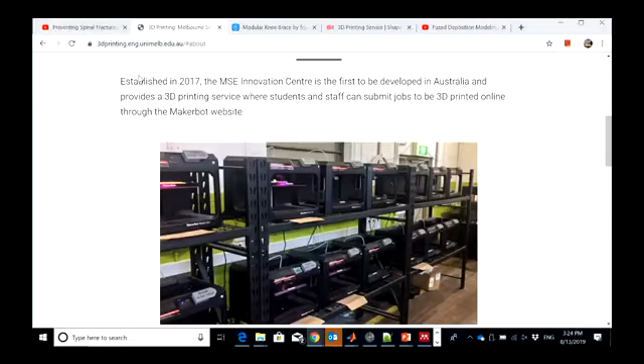Let me show you guys something that I talked about last year. You can find this on YouTube, they put it here too. What is it, 3D MedLab? I talked about something else, but since I had this class last year as well, I described a little bit about what's going on, and I even showed them some of the part that you can actually find.

Is the internet connected? I think so. It's connected, but I don't know why it's not working.

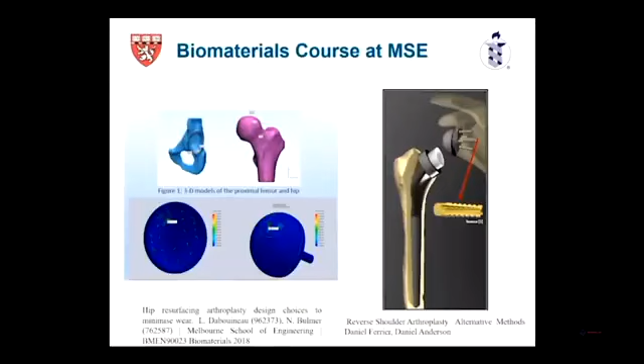But anyway, you see the whole idea here, as you described. These days, if you want to go through patient-specific modeling at any time, there will be some sort of collaboration between surgeons and engineers, as you can see on the left-hand side. And there would be some sort of medical images. So there's something missing, or imagine not even missing, there would be a tumor, for instance, somewhere. This is an example that some of your friends did.

So, something like this - you probably can't read them, but this is exactly one of the things that one of your friends or colleagues here did. You can read it only from here, cup and taper, am I right? The orientation, this is a title, then introduction, method - they did all these things and printed it at the end. That's basically what you mentioned, right? What was your name? Tim. So what Tim said exactly, so you see a problem, right?

Clinical problem. Based on that problem, let's say someone has got a tumor somewhere. The surgeon is going there to cut that tumor, and there will be a narrow hole, something empty, like a bone area. Then you do the CT scan of it, so you know where something is missing. Then, similar to how you guys are doing it with mimics, you develop your product, because you have an idea, you put it there, and you find the material, all these details you're going to learn this year, like compatibility. Then you make sure that works, and you finalize it - and that's not just one way, as you can see here.

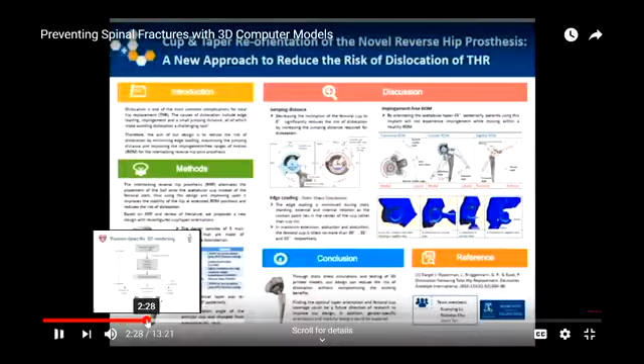So we can watch this later, but I'm just going to stop here. You have medical image of it, then patient-specific modeling based on the image processing that you do. It could be anything - we're using mimics now, but there are hundreds of them out there. Then comes the surgical plan. So you want to plan for that surgery, or the surgeon is going to plan, not an engineer, right? But there's an interesting procedure here - engineers are involved from here as well. You don't have an MRI without an engineer, but surgeons are using them mainly.

But let's talk about the bigger picture now. The engineer would look into the anatomical model, again from the CT, and then what's happening with the instrument they're going to use - how they're going to do custom implants, for instance, based on whatever the question is. At the end, they're going to print it, and the surgeon will do it. But one of the things is missing here. Can you just tell me what's missing here? There's something missing here.

This graph - can you tell? Everything's perfect, right? Nothing is missing. Anyone can find anything or can come up with anything that's missing? No? What's that? Very good, that's exactly right.

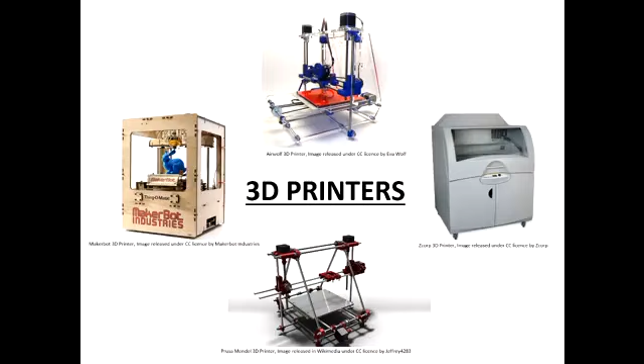All right, so let me show you quickly a few things here. Any question, guys? No question? Back on the diagram, what's the difference between patient-specific instrument and custom implant? So where was it?

Yeah, I did it last year, so I should think like you guys.

Let's go. Surgical planning, patient-specific instruments, and custom implants. Okay, so what does this look like?

When the surgery happens, have you been in the operating room? Some of you say yes. So when you're there, you want to do something, let's say a TKR, total knee replacement. You have some implants ready, right?

But in order to do them, you need other instruments to help with the procedure. It's like a mechanic - you want to change a part of the car, but you need a lot of instruments around it. Those instruments also need to be patient-specific to some extent. This may refer to that.

This is an interesting point for some of you if you want to continue and start a startup or something like that. There are areas in 3D printing that people focus on exactly that - custom-made implant type of things.

So there are people working in this area, but there are a number of people, and this is quite missing, like how to implement this implant. There are instruments that need to be done.

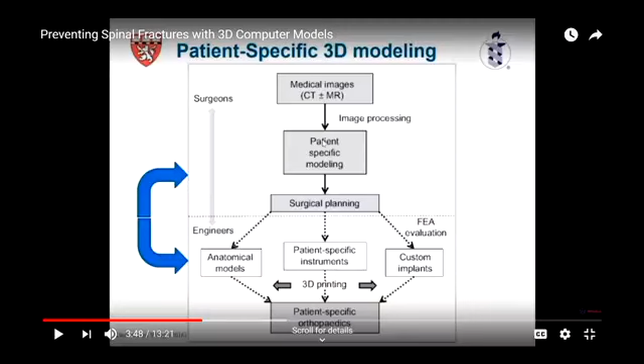Have you heard of that? There's a course called 'by design' - they do something slightly different, where students go to the hospitals and figure out what the problems are, then do a project around that. So each one could be an area for your future if you want to really work in this field. Does it make sense, guys?

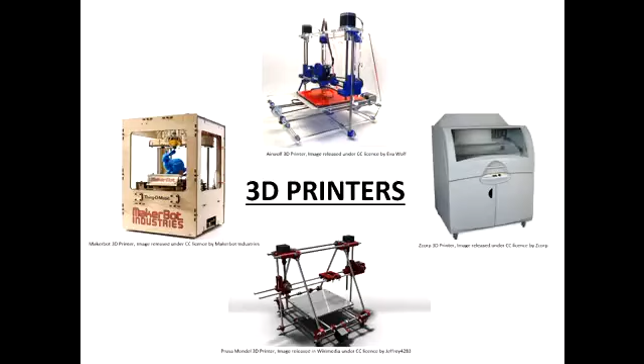Yeah. All right, I think we need to quickly tell you a few things, because you can figure this out - there's heaps of things out there. As I said, lots of things in printing, bioprinting, they change pretty much every day.

So the general idea is you can quickly do prototyping, they're quite fast compared to traditional methods like milling and other details you've probably seen. Traditional methods are time consuming, and they're good for research. You just have an idea.

Do you guys have anything at home, like a 3D printer at home? You have it? You're thinking you have it or not? Let me check if I have one at home. You have 3D printing at home? Anyone? Someone just raise their hand? Yeah, cool. So what are you using it for?

Prototyping. Excellent, what type of prototyping? Electrical? Oh cool. I actually have a friend here who has one, and he's doing a lot of - you've probably seen it - hands for amputees, and he develops a lot of soft robotic type things. They have electronic parts like microcontrollers, and you control the hand and arm and stuff. So they have it at home and do it. You guys can have it too - I'm sure it'll be quite common in the next maybe 10 years or so.

Like a proper printer that we have, it could be a 3D printer. Anyway, we talked about subject-specific type of things you want to do. The cool thing about 3D printing is if you have a 3D model, you can actually print it.

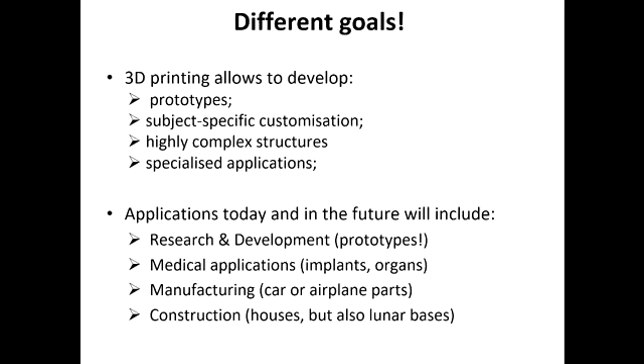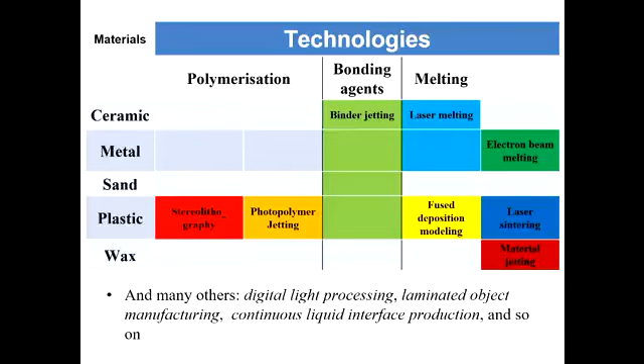So you know the applications, I don't want to just go through them, you can have a look later. There are many technologies - you can have ceramic, metal, sand, plastic. Just Google them on YouTube, there's a huge number of things on how they work. I'll show you one or two examples, and then you guys can go ahead and do your best. So one of them is fused deposition modeling.

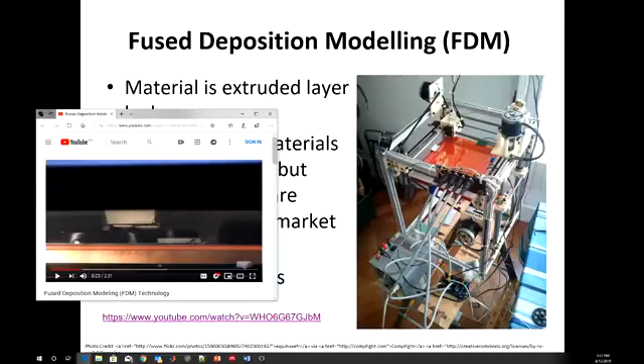Let me see if it works here. Hopefully it would, well, it's just 2 minutes, so let's see. Hey guys, oops, it's showing here, but yeah, I'm bringing it up. Okay, I think I should bring it over because I have two monitors, and it's going to the other monitor that I don't have here. What happened to this computer? Okay. Hey, can you see it?

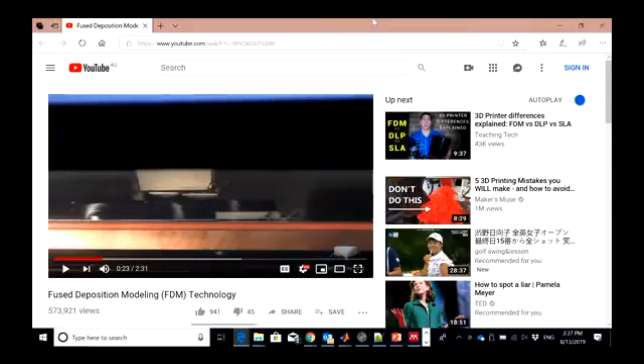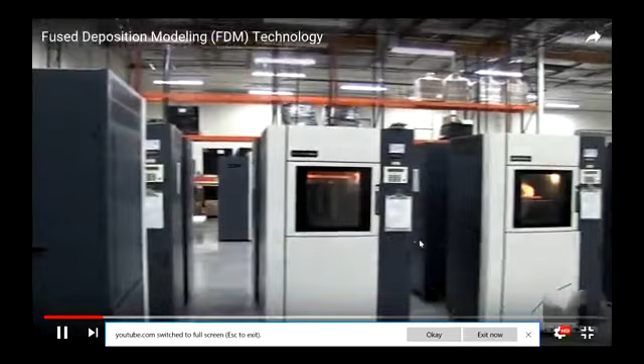Fused deposition modeling, or FDM, is a layer additive manufacturing process that uses production-grade thermoplastic materials to produce both prototype and end-use parts. This technology is known to accurately produce feature details and has an excellent strength-to-weight ratio. FDM is ideal for concept models, functional prototypes, manufacturing aids, and low-volume end-use parts.

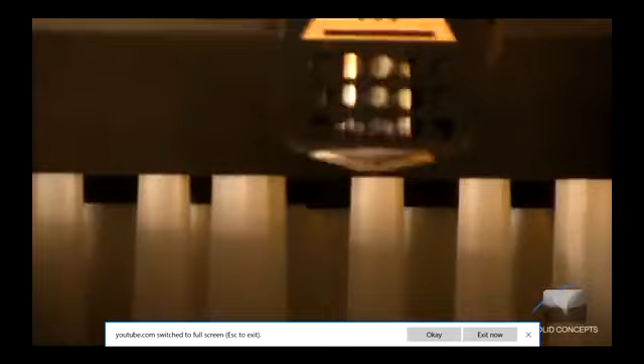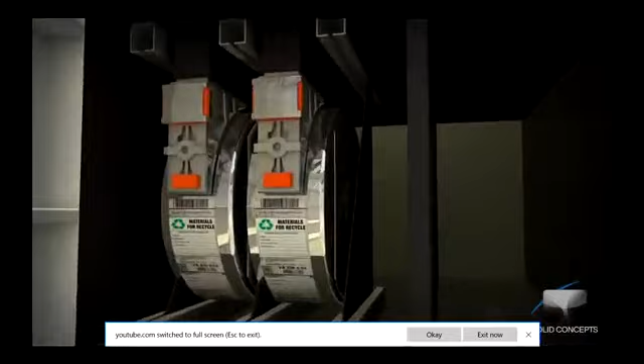The FDM process begins by slicing 3D CAD data into layers. The data is then transferred to a machine, which constructs the part layer by layer on a build platform. Thin, thread-like spools of thermoplastic and support material are used to create each cross-section of the part. Similar to a hot melt glue gun, uncoiled material is slowly extruded through heated nozzles. The extrusion nozzles precisely lay down both support and thermoplastic material on the preceding layers.

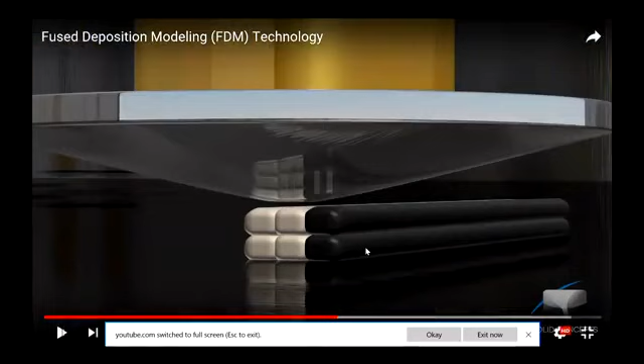So guys, that's the whole point. But pretty much all of these 3D printing technologies are based on that - really going layer by layer. So in order to do that, your model needs to be, what do they call it...

It needs to be sliced, right? So there are many software packages that you can buy. You have a 3D model, and you'll learn this in your tutorials or workshops - if you have a 3D model, it's not just a solid 3D object. You can consider it as each layer, and overall it makes up the 3D shape, but it's not a proper volume that you can see. Does it make sense? There's a subtle difference between an STL type of file and, let's say, a SolidWorks type of volume. You know what I mean?

Because in SolidWorks, if you have a sphere, the sphere is a proper sphere. But if you have a 3D printed version of it, you can't make it a perfect sphere - you need slice by slice, with lines going around each circle. If you increase the number of slices, you get closer to the actual sphere. Does it make sense? So that's the difference, in a way - it gives you the resolution. In each layer, depending on how much distance there is from one layer to the next, that will define how accurate and how smooth the final product would be.

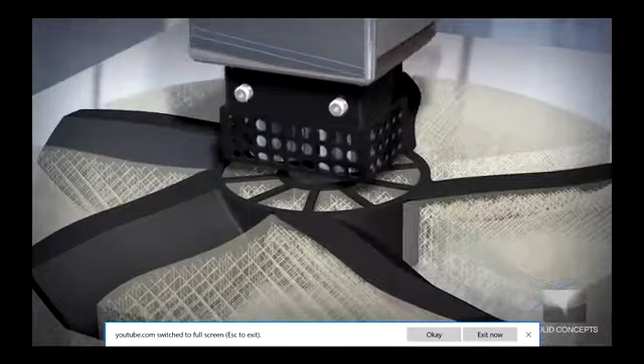The extrusion nozzle continues to move in a horizontal XY plane while the build platform moves down, building the part layer by layer. Yeah, this is also another thing - pretty much all of them have it. So you have a surface, and you build that layer, then this layer goes down and the next one comes up, right?

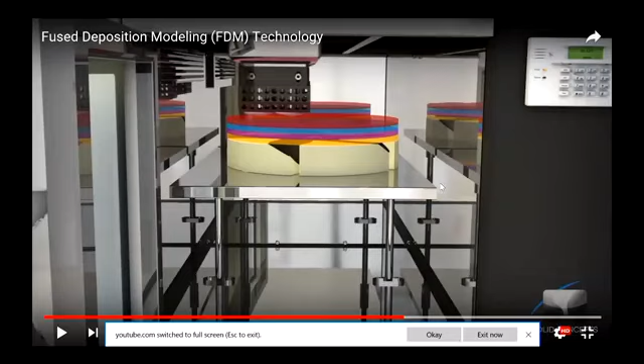But imagine you have a structure that has, let's say, something hanging out. So there's nothing below it, you know what I mean - below the surface that you want this to be on. What can we do then? Does it make sense? So you have a structure with something hanging like that - what should we do?

So you need to support it, right? What can we do then if we support it? So that would be part of it. You're adding something in your geometry, in your CAD model or STL model, putting some sort of support. But the support will be with it when it finishes, so you need to remove it later on. You can put all sorts of supports. I'll show you an example later.

The finished part is removed from the build platform and cleaned of its support material. See?

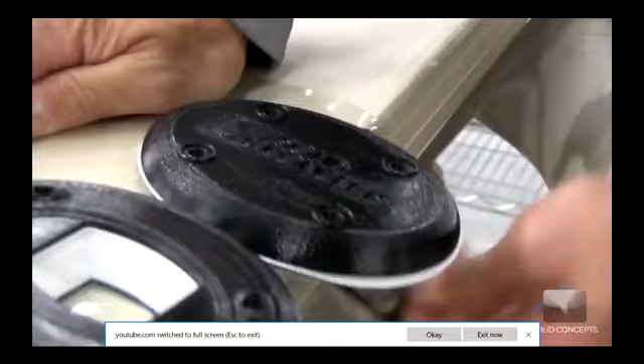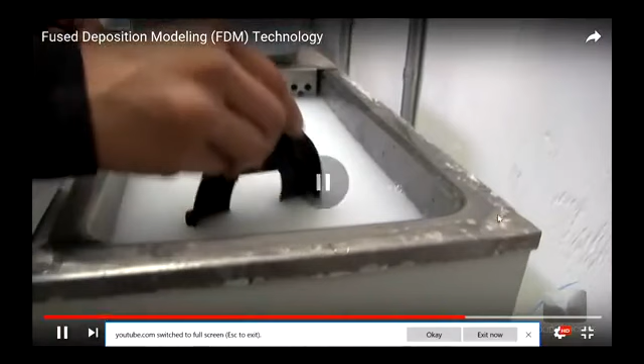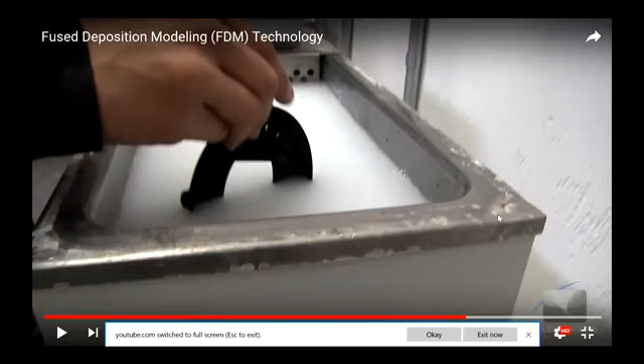Raw FDM parts have visible layer lines. However, service providers such as Solid Concepts offer multiple finishing options. This is also another beauty of what you guys can do - some of your friends last year were good at this, they did some finishing, but some people brought just raw material to us. That's a visual presentation - try to present it in a way that shows you've done more, not less. So just try to sand and stuff like that.

Create smooth, even surface parts, including hand sanding, assembly, and cosmetic paint. You see the differences? That was the first one, and then you did the finishing. Whatever you get from the workshop would be like the first one - they don't do that finishing for you guys.

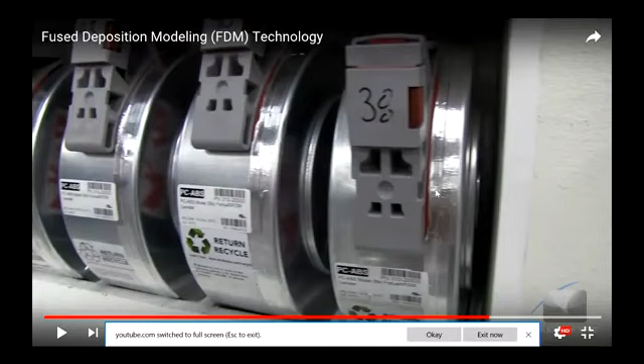FDM parts are constructed with production-grade thermoplastics, including ABS, polycarbonate, and ULTEM. They are both functional and durable. You see the difference? FDM is utilized in a number of industries, including aerospace, automotive, industrial, commercial, and medical.

Cool. So you get an example of it.

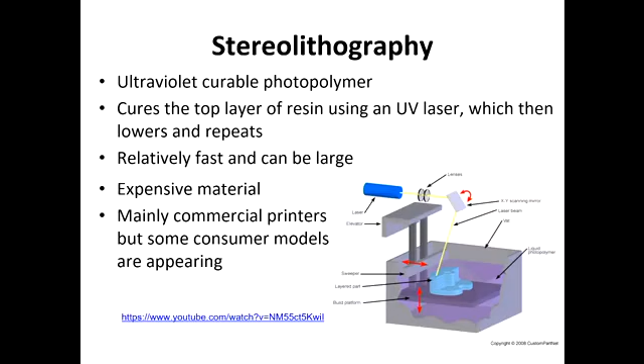So there are several other methods working here. This is another one - I'll send you this link, go ahead and watch it, because it's quite similar in idea. This is also cool, but it's like a laser version of it - slightly different. Let me see if I can show you guys this one.

Do you guys have any questions?

Can you see that? Yep. There should be a... let's watch this one together.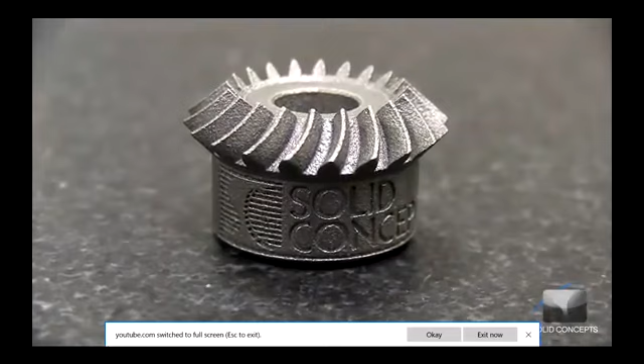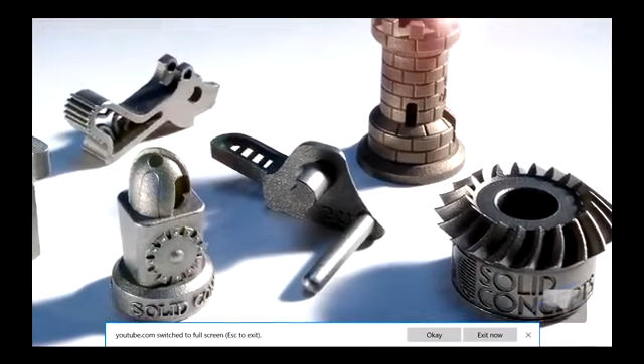Direct metal laser sintering, also known as DMLS, is an additive manufacturing technology that creates metal parts directly from 3D CAD data without the need... So you see the differences - this is metal actually, not like the plastic type of material. It's quite different - laser, and each layer is built up. DMLS utilizes a variety of metal and alloy materials, such as stainless steel, cobalt chrome, and Inconel, to create strong, durable parts and prototypes. DMLS is an excellent choice for functional metal prototypes, high temperature applications, and end-use parts.

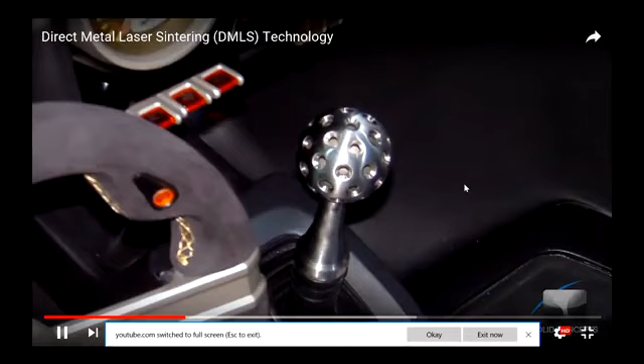This is quite critical - material selection is a big area people might be interested in. Mainly those who study chemical engineering or material science go there, but other engineers can too, even biomedical engineers. Whatever you want to do, there are people who just focus on what material is needed for a product and try to figure it out. They ask a lot of questions - is temperature the issue, is pressure the issue, is fatigue the issue? For mechanical, chemical, electrical - all sorts of things you need to consider.

Imagine you want to develop something for Boeing, for an airplane, for a car, whatever. You have to consider the environment for that, and then you can properly define it. After that, you say okay, this is the material I want, and then what type of methodology you want to build with - that's where engineers come in.

For you guys, like biomedical engineers, it's the same thing - what is the problem, what is the application, then you choose the material and how to model it. Then the next stage is which methodology is best for this particular one. That's why it's good to learn most of these things - just have a look and find them in this type of thing.

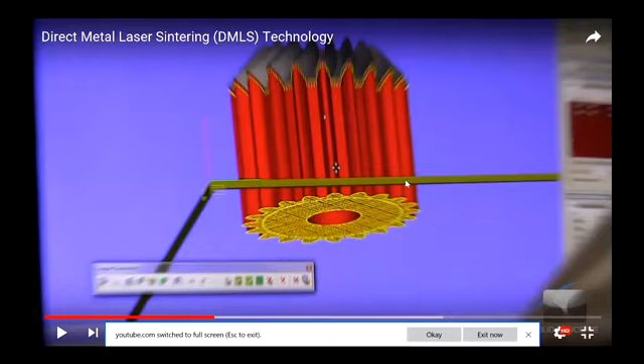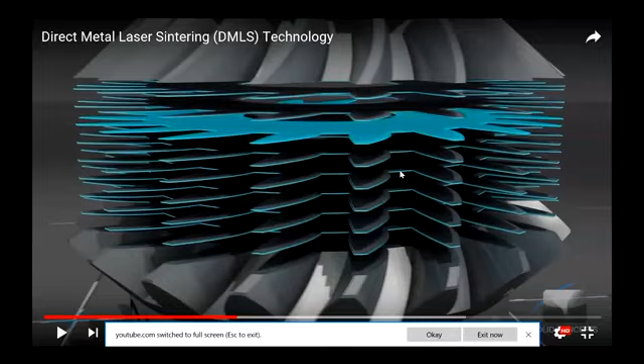The procedure is the same, but some of the methodology will be different. You can see we're following pretty much the same procedure. The program takes 3D CAD data and mathematically slices it into 2D cross sections. Each one is a mathematical procedure creating the 2D version of that 3D model. Each of these sections acts as a blueprint, telling the DMLS machine exactly where to sinter the metal material.

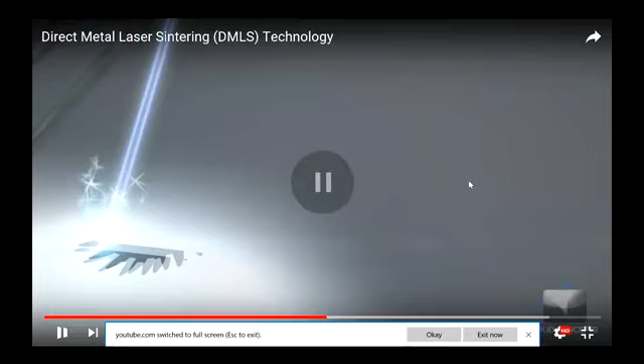The data is then transferred to the DMLS equipment. A recoater assembly pushes powdered metal material from the powder supply to create a uniform layer over the base plate. You can see the powder is there, and the laser is going to cut that, then move to the next layer. A laser then draws a 2D cross-section of the surface of the build material, heating and fusing it.

Once a single layer is complete, the base plate is lowered just enough to make room for the next layer. More material is raised from the cartridge and recoated evenly among the previously sintered layer. The DMLS machine continues to sinter layer upon layer, building from the bottom up. As the part is built, support structures are added to give supplemental strength to fine features and overhanging surfaces.

The completed part is removed from the base plate and treated with a hardening heat process to further harden it. Any support structures are also removed. Do you see the support here? This is quite important because it's metal, so you need a proper support for that. The finishing part might take more time.

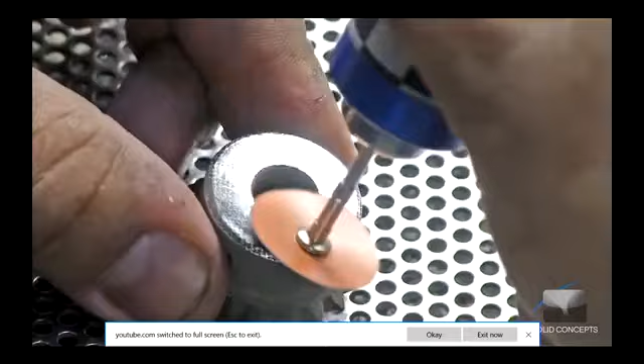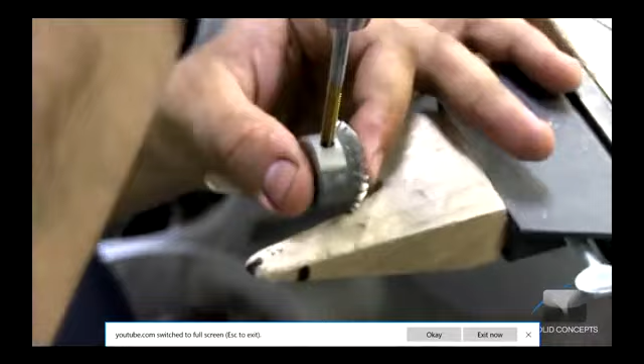With numerous surface treatment and hand polishing options available through service providers such as Solid Concepts, DMLS parts can be used in highly cosmetic applications. Typical uses for DMLS include tools and manufacturing units, small integrated structures, dental components, surgical implants, and aerospace parts.

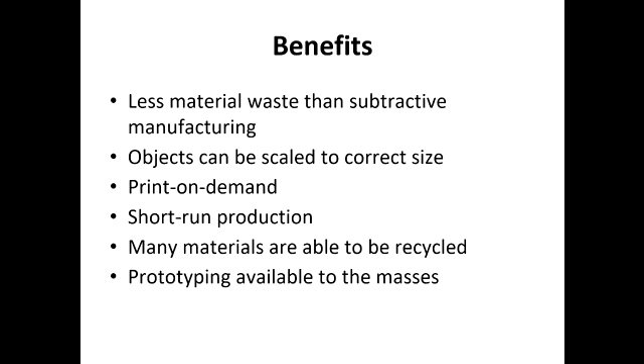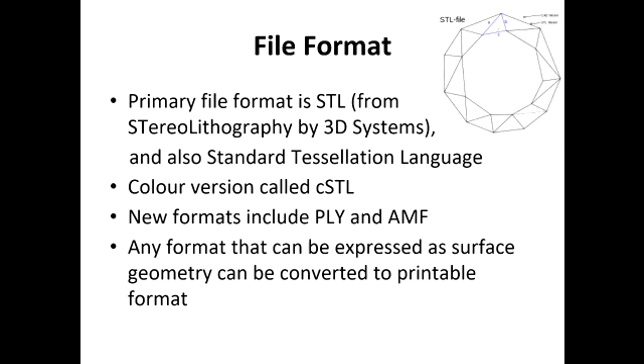This is what I was telling you about the STL file versus the actual model. You can see the sphere or circular shape—the CAD model is a proper circle, but this is the other version of it, so the computer, or the printer, understands it. This is a type of code that you don't need to know in detail. From your CAD model, after slicing, there will be code sent to the printer, and the printer understands all these things and builds it layer by layer from there.

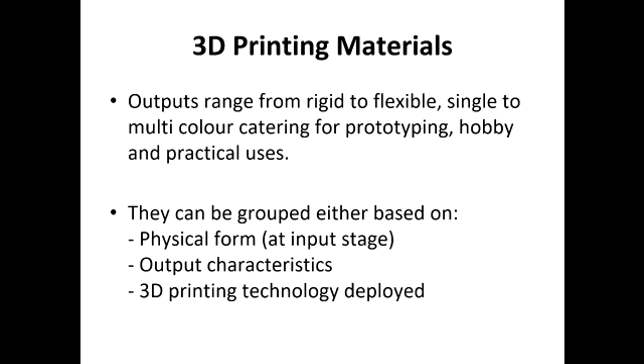We just touched a little bit on different types of materials. There are quite a few, from thermoplastic to metal, as you noticed, ceramic, and even colored or non-colored versions. Depending on what you want, you can simply choose.

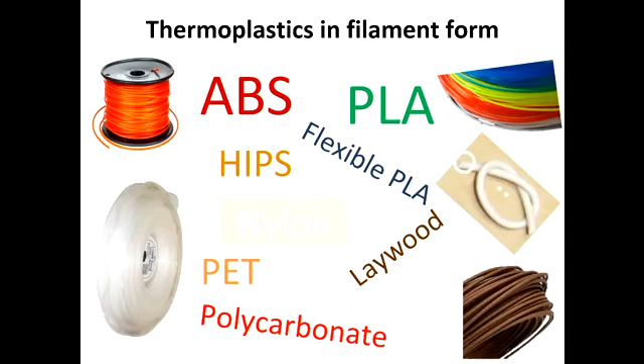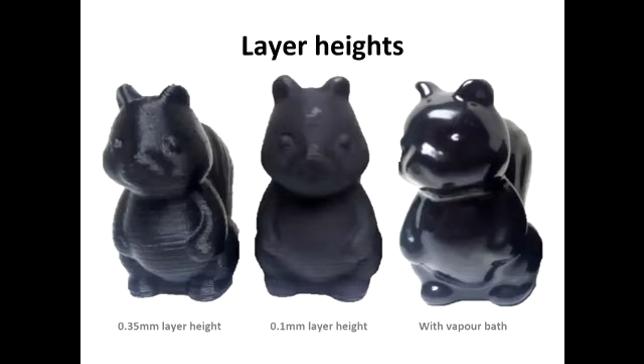These are some of the thermoplastic versions in filament form. You can see the filament will be fed in, melted somehow, and each layer built up on the other. This filament example relates to what we've been discussing in terms of accuracy or resolution—if the layer height is quite big versus smaller and smaller, you'll see different results.

The last one has been finished as well, because it says the vapour bath. So you need to do some sort of finishing at the end, even if it's a small layer distance or height.

Can you see that? All right.

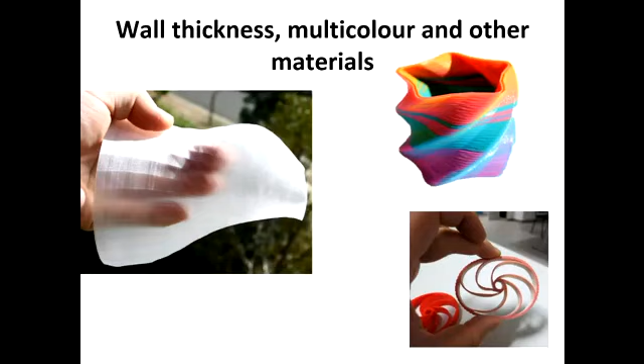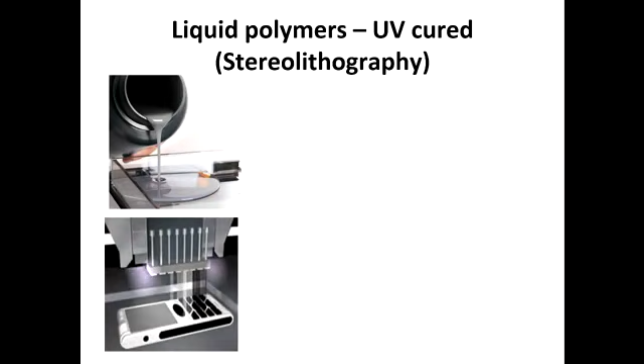Some other applications you can figure out, like wall thickness, or multicolor printing, or other materials we can build. Some of them are interesting because you can combine them and print a sort of soft material. It will look hard, but it's essentially soft robotics type of things. Just Google it, you will find many hard or cute versions of it - there's another technology basically. Just get the names, and I'm sure if you want to know more, you can figure them out.

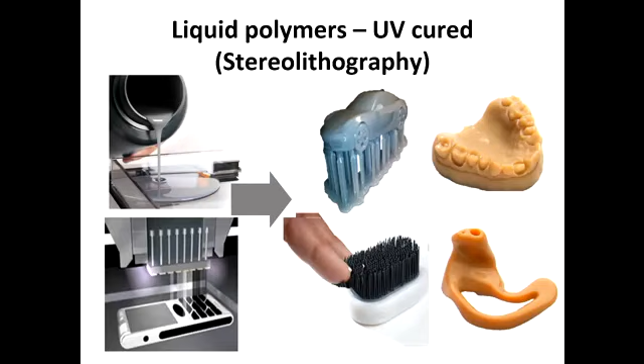They can be used in dental or other types of biomaterial, or musculoskeletal systems, for instance. For the powder versions, we talked about it and I showed you a few things like the laser version, with some examples. There are also other examples in terms of prosthetic versions. There was someone who gave a talk last year.

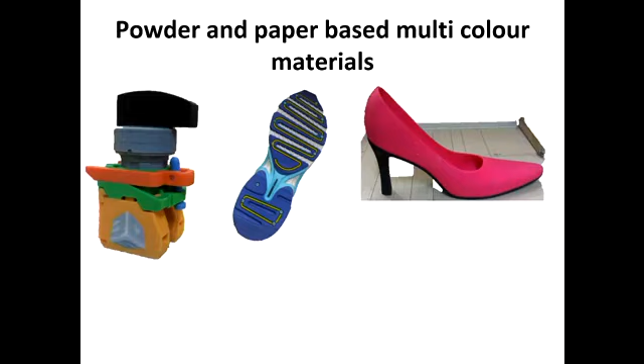I think she came from the States, and she was talking about toys for kids who were amputees, but who didn't have much access - they would be in poor countries or third world countries, and they had a community. I forgot the name, but I'm sure you can figure it out. They had people interested, let's say in Australia, the US, or wherever, and they would be connected to these people, and they would build and print whatever was wanted and send it to them, like to Africa or whatever. There were toys and different types of hands and arms, and that was really a cool project. She had so many people, a big community now. I forgot its name, but it's a really cool project.

It's not just a matter of biomaterial. You see that 3D printing is everywhere, right? From art, to, let's say, even music.

I was actually in a conference three weeks ago about a musical performance. There were people interested in, imagine someone is playing the guitar, but they have a lot of musculoskeletal issues, right? Is anyone playing any instruments? No? But you've probably heard that these guys might have problems because they're doing it a lot, maybe 6-7 hours a day, and they develop different types of musculoskeletal problems.

There was a guy actually building a support type of thing using 3D printing - that's kind of biomaterial. But there was another guy who was not only doing this, but adding some sort of electronic devices into that, while you're playing the guitar, adding extra capability. If you're playing the guitar, you have certain frequencies, so he could manipulate it to access other frequencies with this, using fingers you weren't using before, like your foot or something. So combining a 3D printed version of it with electronic devices - they call it an augmented musical instrument.

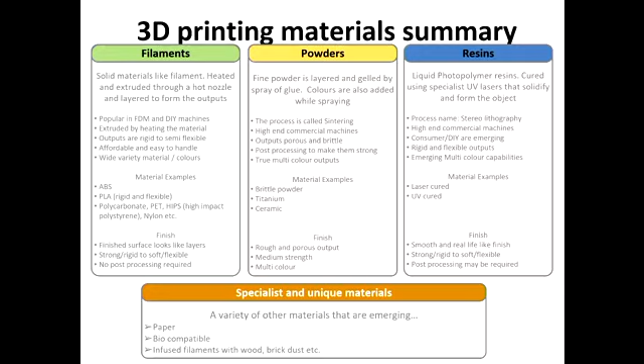So you see the applications - it's not just that you might be interested in this as your career, but anyway. We pretty much discussed filaments, powders, and resins. Have a look, it's not easy to read them, so just have a look after class.

We also talked about this one. Any kind of 3D printing needs a model - you need some sort of solid model so that you can send it to the printer. How can we do that? Can you think of different types? We kind of touched on this - there are three bits. What are they? Can you tell? You're basically doing one of them in your classes, right?

You can do CAD, computer-aided design, or your own cell phone. You know AutoCAD has got one - have you heard of that? Autodesk and AutoCAD have an application you can download, and it might be free for you as a student. When you have that, you can actually go around an object and it will give you the 3D version. These applications aren't that accurate, but good enough for a rough idea of what you want.

Another way of doing it: say you have an object but no model - how do you get it? Like a 3D scanner. There are scanners, one or two in the workshop. We've developed a few things. I've heard it's not easy, but usually you have a handle, or some are fixed and you put the object in. Either the object rotates, or you rotate around it.

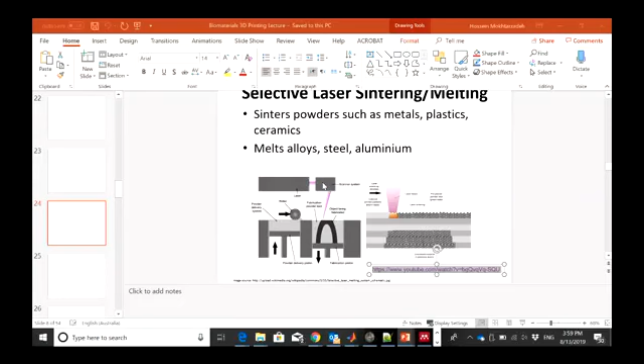There are other things too. Have you heard of this? It's actually a cool one. I was about to develop this with some colleagues - if you're interested in programming and stuff, this is a really good project. What was this called? Styku 3D scanner.

Have you seen this? No? This is also a very good, interesting area - a new way to measure yourself.

Let's have a look. Styku is a body scanner that's revolutionizing the way we track fitness. Simply stand on a rotating platform while a harmless infrared sensor captures your body's shape and composition. And that's it.

Did you get it? So it's basically a 3D map camera, like a Kinect type of thing, which you might have at home. There's a lot out there. You just go around it and that gives you a 3D model. And because you have that 3D model, you can print it, right? Make sense?

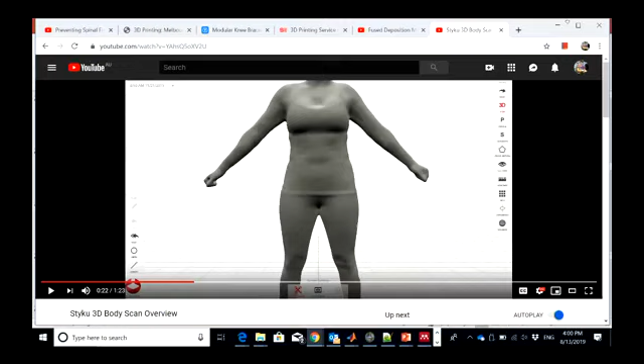Okay, 3D scanners. Or someone has done it for you already - there's a lot out there, right? So all I would do if I wanted to come up with something, just a rough idea, and then print it, is usually this first - there's a lot of websites out there for that.

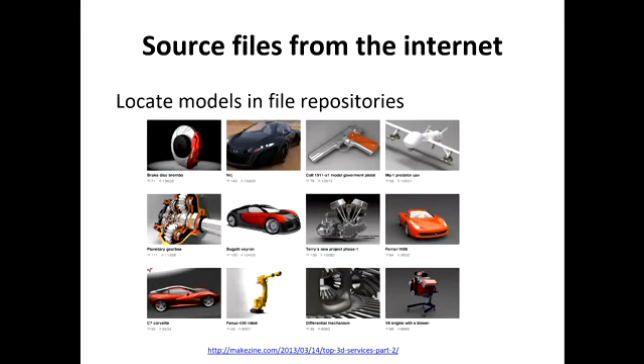Have you heard of Thingiverse, or we have some of them here - Thingiverse, GrabCAD, Shapeways, Format. Have you heard of these websites? Just have a look, they're really amazing. People like yourselves, a huge community, have either scanned it, developed it, or whatever, and they're sharing it. Just be careful about license issues - don't just go and start a company with it and then find out it wasn't yours. It's not for that, it's just for bringing some idea into the 3D world. There's a huge number of them.

Let's check these things, let's see if this works. I'll show you this one quickly - yeah look, I really like this one.

Just tell me something - what object would you like to search for? Can you just think of something? Any word - come on guys, you're like 30 people, can you come up with one word? Bone? Okay, bone. That wasn't very hard, right?

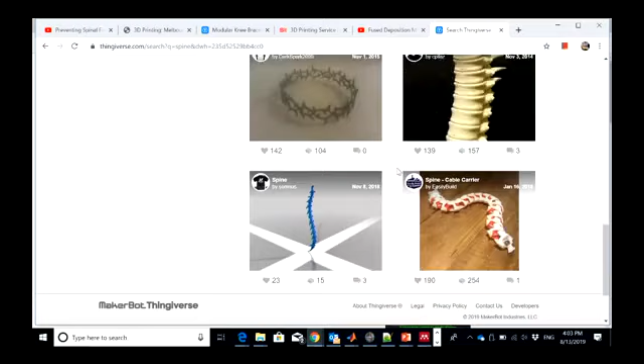So you see different types of results. Let's be a bit more specific, related to our class - let's say spine, you can find a lot of them. Well, let's try knee. So you see people have done it, right? And the cool thing is you just download it and you can actually go around it.

So one way is what you guys are doing, like Mimics and so on - you develop it, develop your own idea, add your implant, and send it to the printer. Another option, if you want to quickly understand what's going on, I'd do this as well - download one of these, if they're like STL files, they usually have pretty much everything.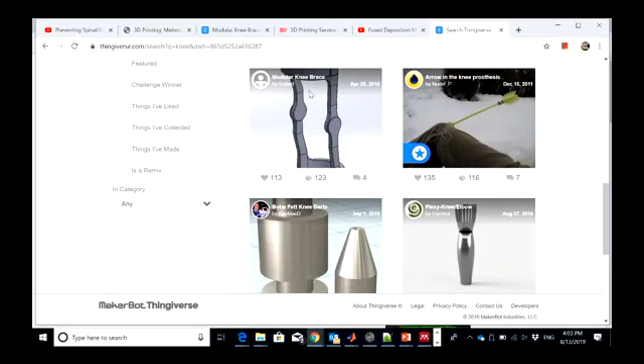Like imagine this - let's go in. You see this person has shared files, and it's like a community. What do they have? They have the files - go ahead, the files are here. You see, everything is here, right? What do you want?

But please don't just copy and paste. We're showing you these things for learning purposes, and do not just copy, because we can easily check that you've copied from here. So use them for your learning, but do the procedure as your supervisor or Peter asks you, for instance. Okay?

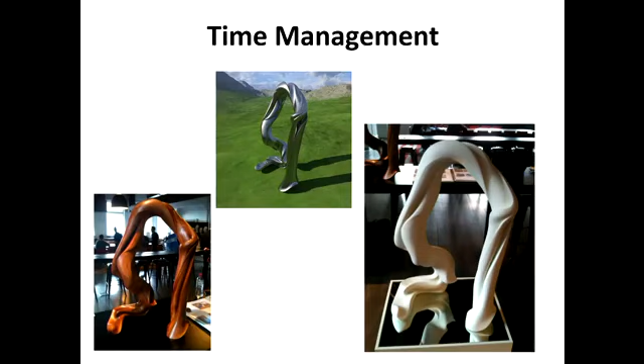And as I told you, just send something for the printer to understand all this procedure and stuff. I can quickly show you that one as well.

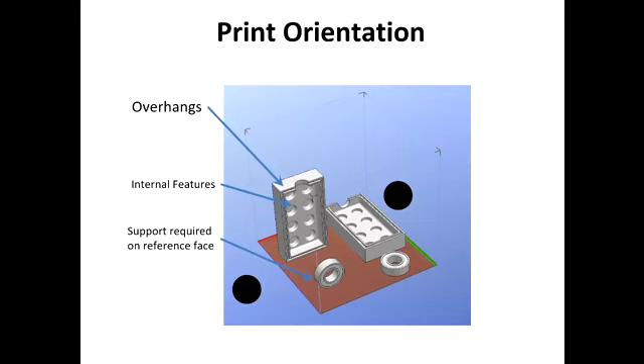So the meshing, we talked about this, resolution, the printing orientation - you may not need to be worried about this, but in the past students had to go and print themselves. How you do it is important, because sometimes you can actually avoid that kind of support just by rotating, printing it in another angle, or using different types of raft or support you can add.

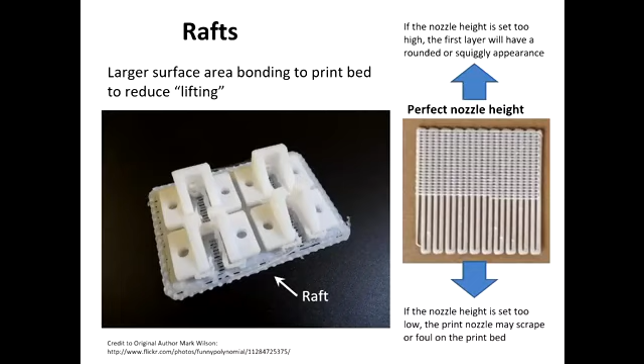Don't worry much about this, but you might submit something to the workshop, and they will come back to you and say, oh, we can't do that, change this one. So you need to change it and then submit it again, right?

Have a look, or the infill - these are the things you should consider. If you have something that will collapse from part of it, you need to put some sort of support within it. So you can have it hollow, that's fine, but you need to support from within. Make sure you understand how the procedure works.

You notice some of them, right? And then based on that, build or make your prototype. Does it make sense, guys? So I want you to just familiarize yourself with the problems that you might see.

It's not just like I print it and send it up and they take care of it - no, they don't take care of all these things. They may just rotate it for you, they may give you some ideas how to improve it, but you would need to understand the details yourself.

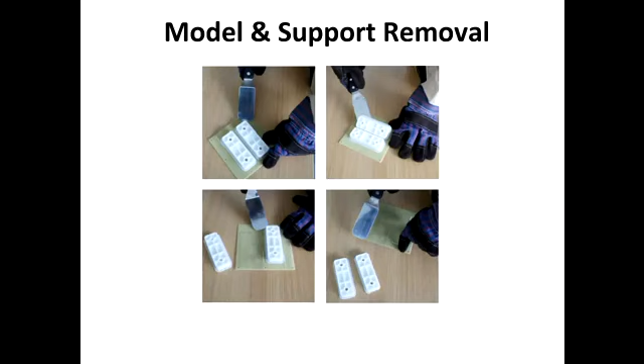So you see here, for instance, like a support here - this type of support we need for different layers, and then they might give you it even with the support, and then you need to cut it out or remove it. I'm doing the finishing part, okay?

This is also another example, removing the support, as I said, and there would be a lot. You may not see it because they would print it for you, and if it's not working they would tell you. But if you don't care about all these details, these things might happen - like the temperature not working well, or the support not being there, there would be quite a lot of difference.

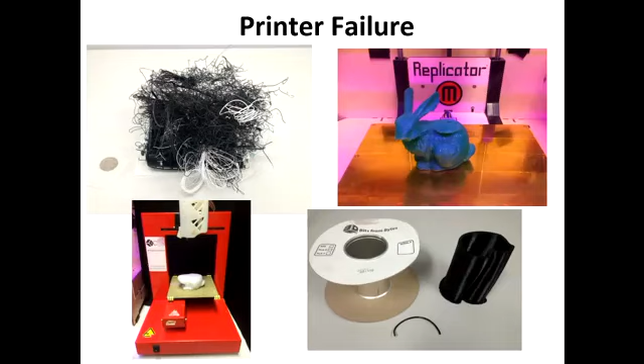I'll show you another thing that tells you some of these problems - the printer failures, have a look. So, engineering workshop, maybe quickly I'll tell you, we have like 5 minutes time, right?

Do you have any questions? No? Are you guys following me? Is it something that, okay? Alright, because there's a lot of things in 3D printing.

You can actually put your life in it, like it could be your career. So you're just touching some of the surface, you can see that. You can actually go to the metal - we have one metal printer here, just next to our Karen lab, and I'll show you a little bit about Karen as well. So you can go and have a look at what they're doing. You probably can't see inside, but at least get an idea, right?

So I think this is what the workshop has, so don't worry about this. You can actually have a look at the details. Maybe I'll show you this before we go quickly. So I think the workshop...

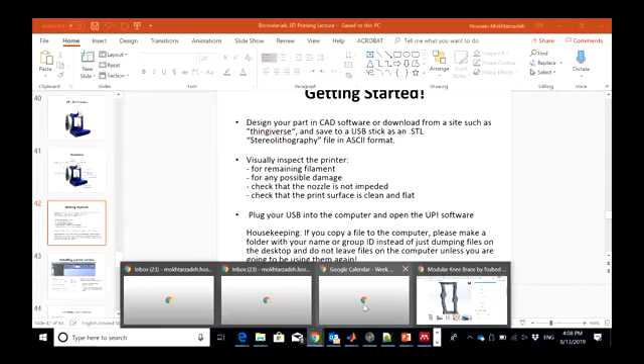So you don't necessarily need to submit a job, but if in the next few months you have an idea, just submit a job to get a feel for it. Because I think it's free for your class - it's all free, so you can do it a few times. And then they'll tell you the details, how to pick up, and where it is, right?

Go and read these ones. These are actually telling you how to submit. We showed everyone this, and people come and ask questions, but they actually go through every single thing, right? So you don't need to go through it now because you can just simply read. They've done a really good job, just go one by one. If I tell you, you have to sit down and follow the procedure one by one, it's not worth it. I'll just show you where to go and find things.

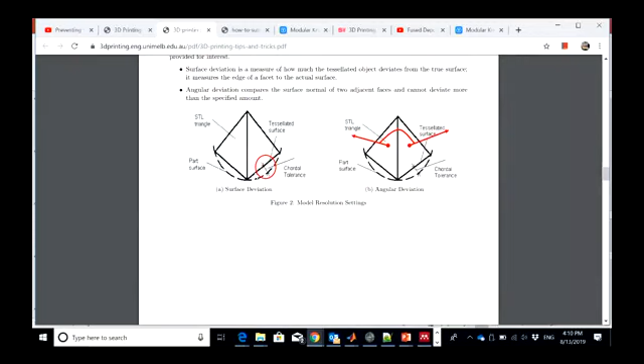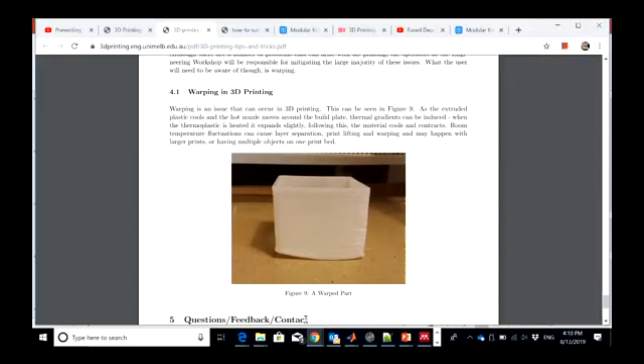Tips and tricks - have a look at some of the things we showed you here, like what STL means, what mesh means, and the different types of errors you would face, like overhanging. Have a look at what happens when we have an overhang, it basically hangs, or there's no support. I'd suggest going through all these possibilities. With this type of part you'd expect it to be right angle, but you see what happens. You probably won't see these type of problems, but anyway it's good to know. Make sure you know the checklist before you submit anything. Does it make sense?

All right, so I think this is pretty much what I wanted to show you guys.

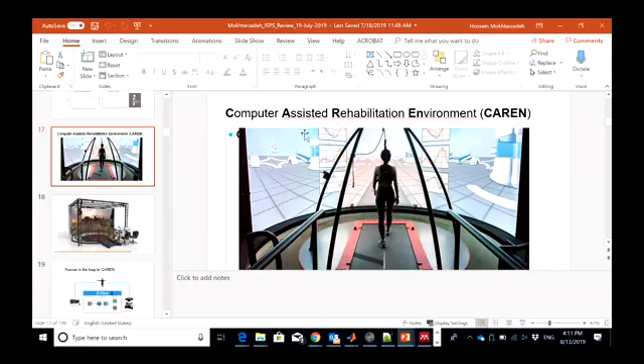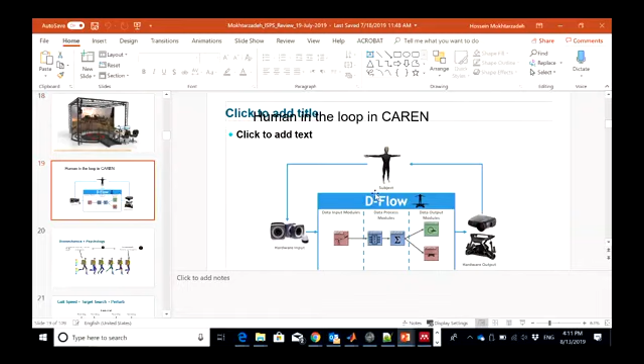Before we go, let me quickly show you a few things. I'm running this CAREN lab as well, and some of you guys are either working with us or have done testing with us. If you're interested, you can send me an email - we're doing some testing that's quite interesting. People walk and being perturbed, doing dual tasking, and here is the actual testing. You'll be familiarized with biomechanics and other aspects of it. The cool thing about this is human in the loop, meaning you are part of the system - usually you're not part of it. So even 3D printing would help in this area. Peter and some of his colleagues have a training center where they're trying to develop different types of implants, and maybe they want to test them here.

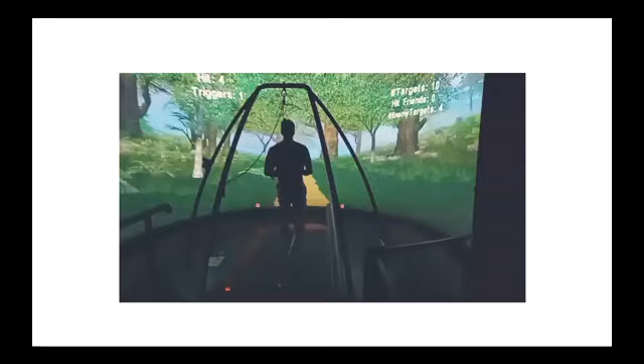Let me see if I have a simple example - this is someone enjoying being perturbed. Can you see that? This is the type of things we do these days - you're finding a target, and you want to understand the effect of cognition as well as physical activity at the same time. So it's kind of gaming, and since you guys do gaming a lot, it's going to be fun. You see that? Yep, so that is it.